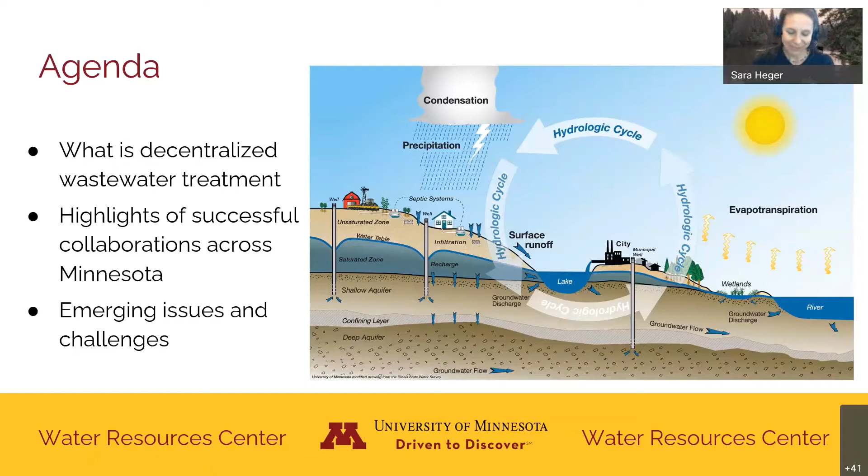But septic systems can be part of the solution of that issue. It also points out how important properly treating our wastewater is. Ultimately, probably most of you either with lunch or right now are drinking a beverage, and what we have to remember and consider is that water has been used before and will be used. One of my last topics, an emerging issue, is wastewater reuse. Ultimately, all of our wastewater is being reused - it's just a question of how quickly we're reusing that water. So that's always something to think about, that we're just recycling our water over and over again.

So first, looking at what is decentralized wastewater treatment systems - people call these septic systems, and that's what they are, that's what we call them here. But ultimately, there's a lot of different kinds of septic systems. This shows what's sometimes referred to as a drain field or a conventional system. It starts with primary treatment in a septic tank - Jack alluded to this being like wetlands, in that septic tanks are anaerobic, so the treatment occurring there is under an anaerobic environment. Some of my first work at the university 20 plus years ago was using constructed wetlands to treat wastewater, not very commonly used in our climate here for various reasons - we can talk more about that at the end if you're interested. But really, we start with that primary treatment that's more solid-focused.

Looks like we lost Sarah real quick there.

Sounds like your video went out and the screen share went out. Can you still hear us? Screen's back up, I'm back.

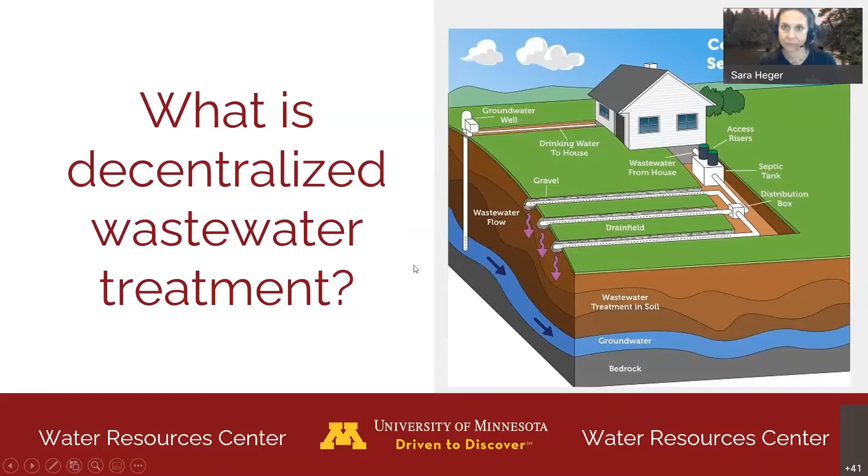So going over what we just talked about, a typical decentralized wastewater treatment system starts with primary treatment in a septic tank like you see here. Every wastewater treatment process starts with this, where we allow sedimentation to occur: heavier solids settle into the sludge layer, lighter materials like oils and greases float to the top. We see about 50%, give or take, solids removal occurring in the septic tank, and that results in the need for maintenance—every 3 to 5 years, most homes need to have that tank cleaned to assure we're not building up excess solids.

Our final treatment, disinfection, is in the SSTS portion, and what's required in Minnesota is 3 feet of unsaturated soil. There are other options for advanced treatment systems on challenging sites, challenging soils, or larger systems. For example, the largest septic system in Minnesota that I'm aware of serves downtown Afton, Minnesota. That's in Washington County, and that system is 60,000 gallons a day—that was their design flow anyway.

Directly down gradient from that are wells. So when that system went in, it was required to have advanced nitrogen treatment and secondary treatment prior to the soil, to assure that when wastewater potentially reached down gradient wells, it was safe for human consumption. In some areas, they rely upon well setbacks and groundwater dilution to meet that nitrate limit, but with larger systems, that's really not an option.

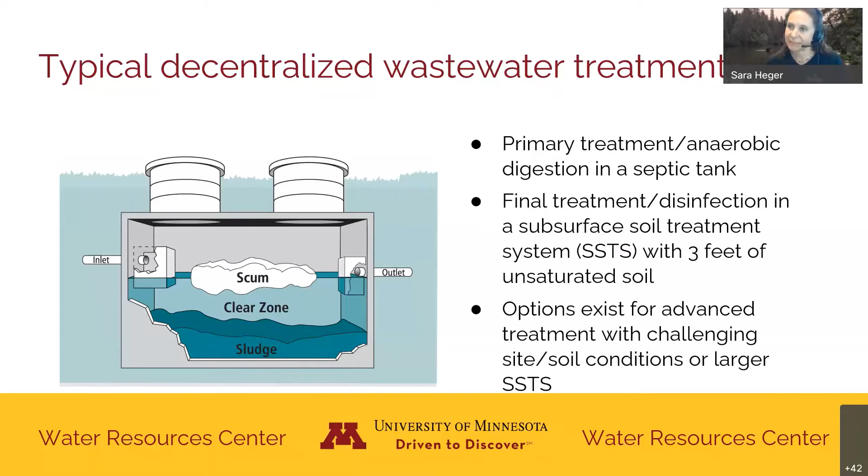Here in the Midwest, being very far from the ocean, we're not as concerned about nitrogen getting to surface waters, but we're very concerned about phosphorus getting to our lakes. So ultimately the nutrient issue depends a little on where you live—phosphorus is our limiting nutrient in most of our fresh waters.

So how this looks in someone's backyard: whenever possible we'll see from the structure, usually a house, but there are also a lot of commercial properties—campgrounds, rest areas, restaurants, since a lot of outstate Minnesota isn't in municipalities. The wastewater, when possible, flows by gravity. Every once in a while someone has to have a pump in their basement to get things out of a lower elevation, but then it flows typically by gravity into that septic tank, and when possible, by gravity to a soil treatment system. This shows a drain field type trench system.

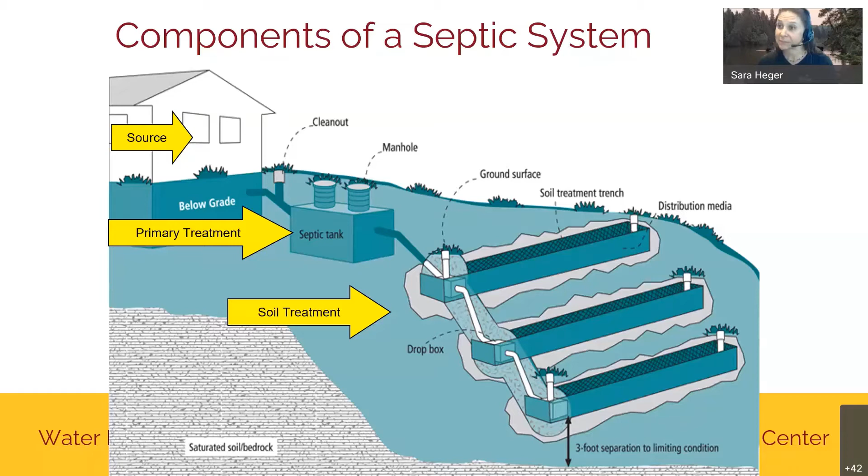The key thing to notice on the far right is that from the bottom of the system to saturated soil or bedrock is where we measure that 3 feet of soil. It was the most amazing thing to me when I got into this industry, that if you take dirty sewage—millions to a billion bacteria and viruses in 100 milliliters of water—after that 3 feet of treatment, the viruses and bacteria are gone. The organic material is all removed, the phosphorus has all been absorbed, we've converted all that ammonia to nitrate, and in some instances actually denitrified that as well, if the right conditions exist.

So this is where if we had easy polling, I would have you all fill out a poll. If you want to type this into the chat, you can. Otherwise, you can just think it in your head because I'm going to give you the answer. But just from your knowledge, what percentage of homes in Minnesota are served with a septic system?

Anyone have a good guess? I see a 24, I think that's what I saw. An 11. Anybody else? Casey's - I'm gonna just tell her right now, she's right?

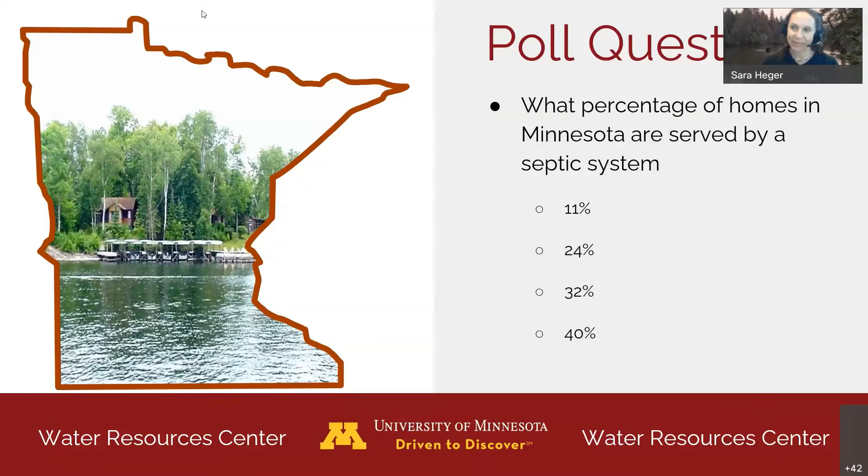So the right number in Minnesota is actually 32%. The national average is actually a little lower, so Minnesota is one of the higher percentage states. There are states - if you've ever been to New Hampshire, actually has more than 40% of their homes on septic systems. But here in Minnesota, we are right at that 32% number.

All right, so a little overview here of some of the information - oops, I have to go back one here, I missed that, just moving around faces. The history and statistics in Minnesota.

So this program in Minnesota actually started at the University of Minnesota in the mid-70s. There was a professor in the biosystems and ag engineering department at the time who really was asked, why are some of our lakes getting green? Could it have anything to do with these septic systems? At that time was right around the time the PCA was forming.

So there were rules that were written and there was a voluntary certification program that was started, and the University of Minnesota training occurred. Although I did mention it started in biosystems and ag engineering, very soon after, a gentleman named Roger Machmeier reached out to Jim Anderson in the soils department, and the two of them really together built our training program. Because at the end of the day, septic systems to me are the nexus of where engineering and soil science meet. So I'm guessing most of you are from the soil science side of things, and soils are a huge part of what septic systems are. So that's really what our training program teaches today - it teaches typically non-engineers and non-soil scientists those principles to be able to adequately design and install septic systems across Minnesota.

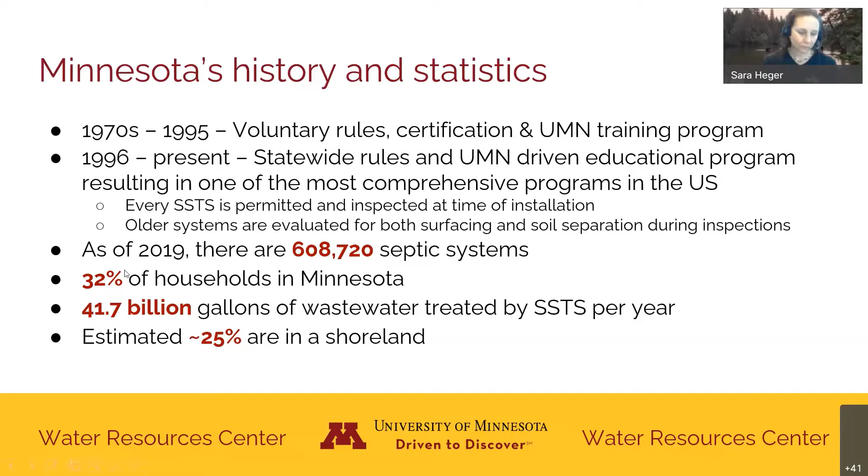This will result in protection of public health. We know how diseases and viruses commonly spread, most commonly from our waste. If our waste contains those pathogens, that can spread via water. The added benefit is that when we adequately protect public health, we're also protecting the environment.

Nitrogen and phosphorus are still, I would say, the driving issue now with wastewater treatment. I think we really figured out in the 70s, 80s, and 90s that organic removal and bacteria and viruses were really important. But what's really getting more attention over the last decade has been assuring that we're also dealing with those nutrients, which are both, I mean, nitrate is a public health issue, but phosphorus is really important in protecting our lakes, rivers, and streams.

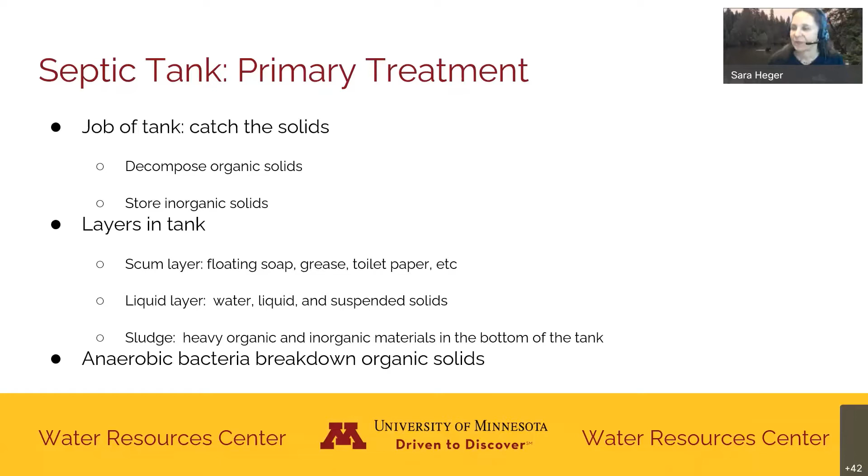So we see those layers forming in the tank: our soaps and greases and a little bit of toilet paper, most of which actually disintegrates within the process. Our liquid layer is not clean, it's still going to be cloudy or turbid, with some smaller particles remaining in suspension, and then the bottom layer being heavy organic and inorganic material. So if you open up a typical septic tank, what you will smell is anaerobic digestion—methane and hydrogen sulfide, gases being formed by that anaerobic treatment process.

So here shows a little close-up of that septic tank I showed before. Wastewater comes in from the left from our house. On the way in, there'll be a baffle, the purpose of which is to make sure the wastewater doesn't short circuit the tank. Septic tanks are designed based on detention time—how many days the effluent has to be settled and anaerobically digested.

So this is a modern septic tank, and the reason I say that is we have a riser both at the inlet and the outlet, and those risers are at the surface. This is really critical for maintenance, in that the proper way to clean those tanks is through large diameter access, because the sludge, as the name implies, takes work to get off the bottom of the tank. The other thing that more modern septic tanks have, which old ones don't, are baffles and screens on the way out of the tank.

The purpose of that screen on the way out is to further limit the size of particle that gets out to the soil. The soil is amazing at decomposing organic material, but some solids present in our wastewater, such as microplastics, may not be digestible by soil microbes. So as much as possible, the more solids are decomposed or filtered out prior to getting to the soil, the longer that soil treatment will function. So again, those are our three layers.

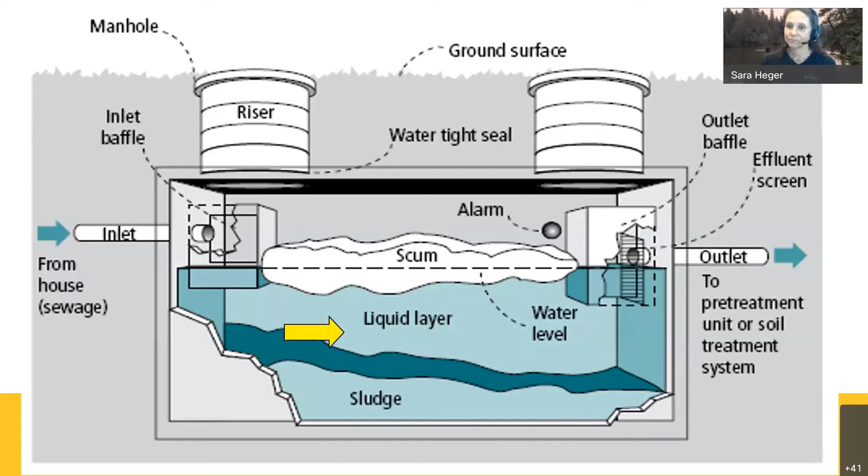So a conventional system—and this is a bit of terminology in our regulations, also referred to as a type 1 system—should rely on passive soil treatment. In order for these type 1 systems to be installed, you need to have 3 feet of unsaturated soil. This could be naturally occurring dry soil, which would allow you to put in a trench system, a bed, or an at-grade system, and I'm going to show some pictures of these coming up.

Or it could be by using mound sand, which is very similar to concrete or C33 sand, if you're aware of what that is. That can be hauled in to supplement any natural soil on site. You still, even to build what is called a conventional mound or a type 1 system, have to have at least 12 inches of dry soil.

That hopefully does a few things. One, it prevents us in most instances from building in a wetland. But it also assures us that even if the wastewater, as it goes through those 2 feet of sand, has been almost all the way treated, we still need somewhere for that water to go. We require, in Minnesota, that all wastewater stay subsurface and laterally move away from the system. If you don't have 12 inches of dry soil, that's pretty difficult.

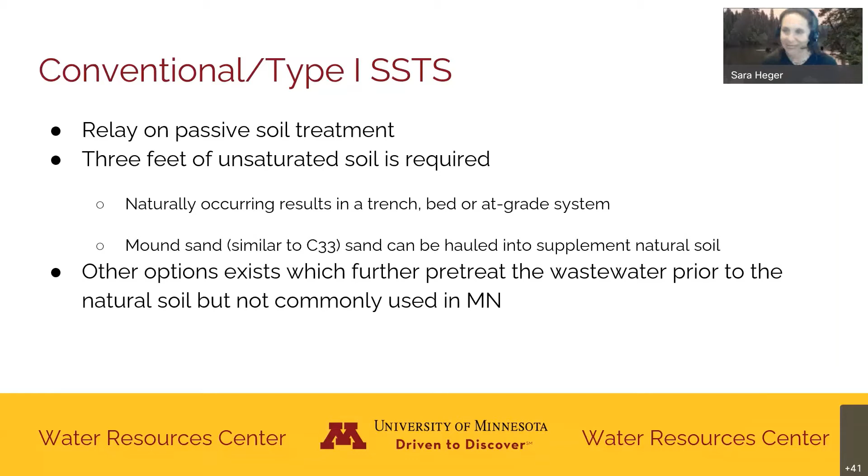There are other options to further pre-treat the wastewater prior to the natural soil. They're not as commonly used in Minnesota. I saw a question pop up about microplastics - we are definitely going to get into that a little later in the presentation. So if I don't answer that, we'll talk about it then.

I've shown some pictures of what the trench systems look like. This is just a bad diagram, but a diagram of what a mound system looks like - where I'm elevating my treatment system with that clean sand, so I still meet my 3 feet of soil. The reason we use sand is we can pick it up from the quarry or pit and move it to another location. Because it's relatively structureless, without using compacting equipment, just by natural construction, we can get it to a similar density that allows for good water movement, good percolation, and good treatment as it moves through that sand.

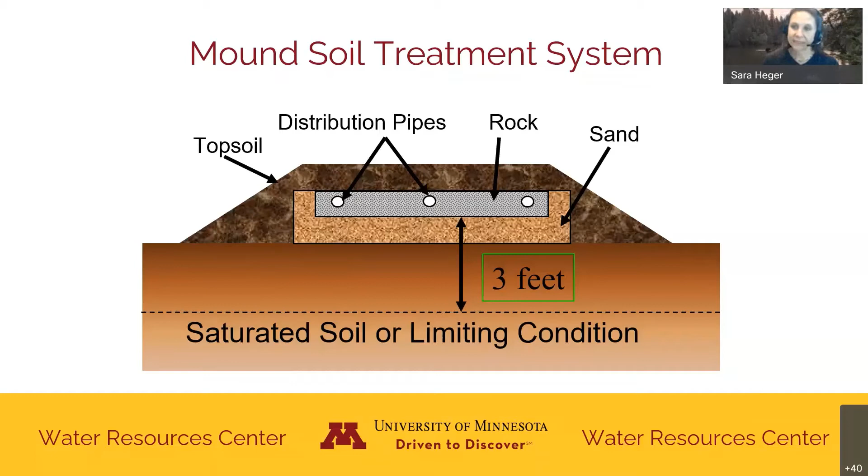So how we determine what kind of system we need - these are all standard conventional options in Minnesota - is how far or where you are in reference to a limiting condition. Our 2 limiting conditions we're really concerned about, and which of these are relevant depends where you live and whose property you're on, is either saturated soil or bedrock conditions. We'll define each of these coming up.

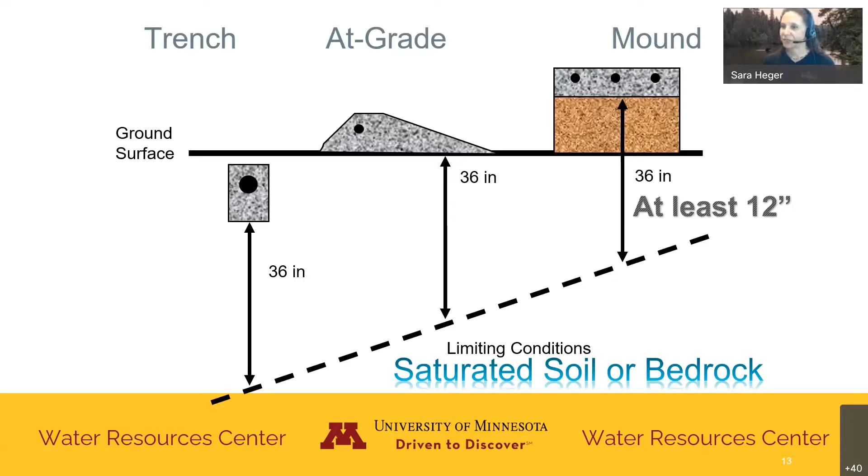On the far left, that would be my trench system where I'm actually in the ground because I'm able to achieve my 3 feet below that. The system in the middle being an at-grade, where I put my rock or distribution media right on the surface. And finally on the far right is a mound system where I'm hauling in sand to achieve my 3 feet, having at least 12 inches of dry soil.

So here are just some images showing what this can look like. The first one is a rock trench. The purpose of the rock - I'll bring up the next one here, that's actually called a chamber system, recycled plastic that's used. In both of these instances, the purpose of the media is just to spread out the wastewater. It's not doing the treatment for us - all of the treatment is really occurring in the soil. So just 2 different ways to do that.

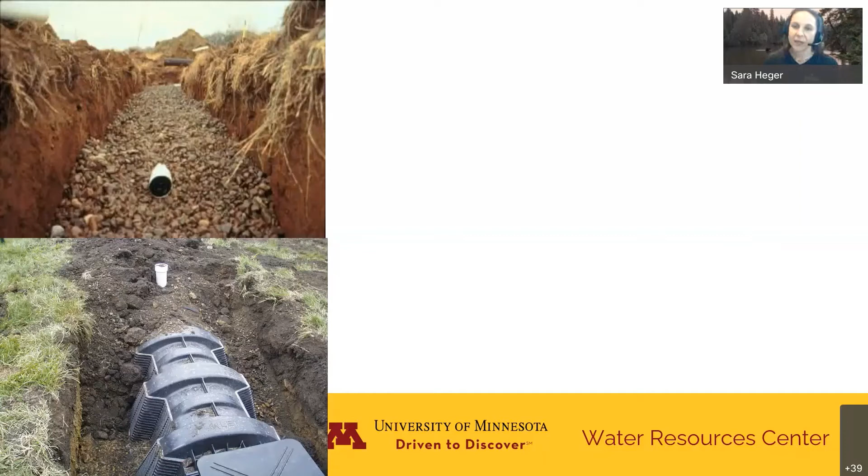So how do we determine what type and size system? What type is allowed is the first thing to consider, how much pre-treatment prior to the soil. Today I'm focusing on systems that just have a septic tank as primary treatment, but there are advanced systems, where a constructed wetland could play in as a pre-treatment system.

The second factor is how much natural unsaturated soil you have. Then the last variable here are your soil characteristics, which are color, texture, and consistency. We'll particularly get into redox features, but for all of our septic system designs, we are doing morphological descriptions of the soil.

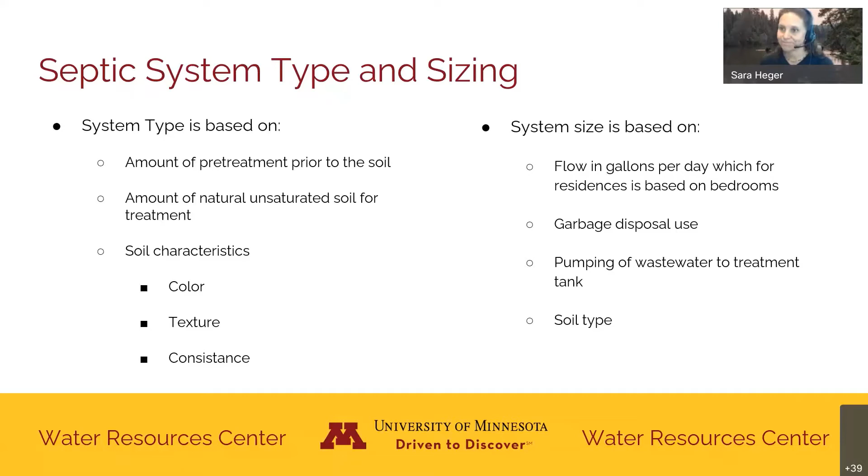Getting into the variables a little bit more specifically, since you understand soils more than most people I get to talk to — the critical soil characteristics we're designing on, the most critical one that affects the system right now is how wet the soil is.

But when we have a depleted matrix, when we have redox features, that is what we are using to define that we have a water table. It may be periodically or seasonally saturated, or it may be a permanent water table — our regulations do not care. As long as we have a depleted matrix or redox features, either of those will make that soil unsuitable for extended periods of time throughout the year and require us to stay 3 feet above that.

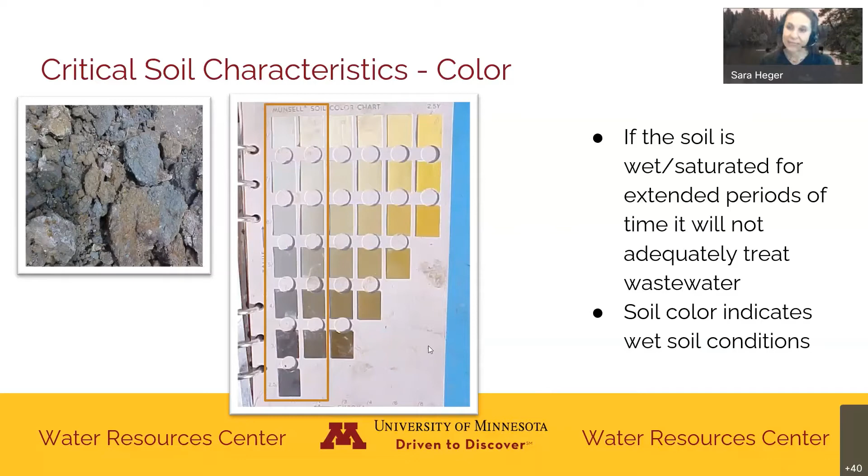So that is how we determine saturation, is by redox features. It takes extended periods of time for these to form. Generally speaking, when we see very gray or depleted matrix, the soil is wet or saturated. If all the iron has left, it's very wet. If it's gray with red mottles, it's typically more of a seasonal saturation, maybe in the spring or fall of the year. But groundwater is groundwater.

We are generally talking about perched water tables versus permanent, more of a regional water table. But some of our septic systems around lakes and particularly sandier soils, we may be dealing more with a regional water table, but very often we're dealing with water that's held up higher in a soil profile.

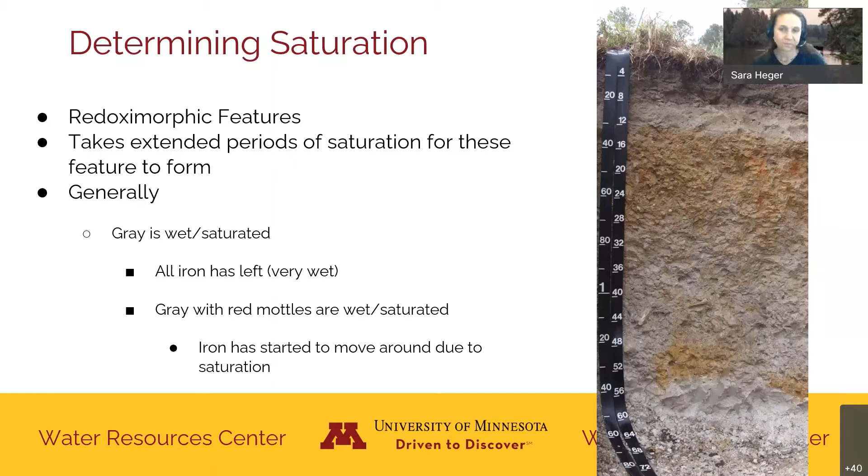The other limiting factor in soils is bedrock, and we have kind of an odd definition of bedrock. What I mean is most of the time when people think about bedrock, they think about something like along the North Shore where you have very little soil and it goes straight to bedrock. But our definition of bedrock is anytime you have more than half of your soil composed of rock fragments, and rock fragments are defined as anything greater than 2 millimeters. We are not going to count that toward soil treatment.

Typically you can envision that augering or boring is very difficult in these situations, so a soil pit can really aid in defining whether or not we are dealing with bedrock. In some sites it's super obvious, but when you get close and you're dealing with rock fragments, it can also be bands - you can run into a band of soil that ends up having more than 50% rock fragments. You just can't count that toward your treatment.

So there are many more nuances to what I'm talking about, but generally speaking, we don't count horizons that have more than 50% rock fragments toward treatment because we just don't have enough retention time. We don't have enough absorption sites. We just don't get good treatment through that portion of the profile.

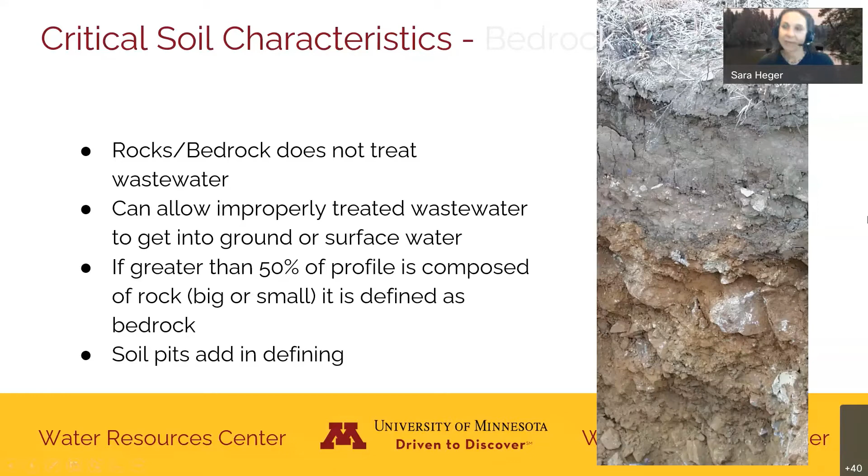So I wanted to touch on an overview of septic systems, how this is administered in Minnesota, and some key collaborations. We certainly at the University of Minnesota don't do this work on our own. Our goal really is having a strong science-based education program. We do research, and we also do outreach.

Tomorrow night, for instance, I'm teaching a homeowner education class in Mower County in the Albert Lea area. So anytime we can talk to property owners, that's really valuable because ultimately, at the end of the day, they are the ones who are operating these systems.

The MPCA has the policy and rules. They are the licensing and certification organization. They also handle compliance and enforcement. On a day-to-day basis, this program is implemented by counties, cities, and townships - our local unit of government programs that permit, inspect, and record keep for the over 600,000 systems in Minnesota. We have a large group of professionals, thousands of septic professionals across Minnesota, which include designers, inspectors, installers, service providers, and maintainers, septic pumpers.

One of the strengths of our program is all of our local unit of government inspectors go through the same training and certification program. That doesn't mean everyone knows the same, but it does set a level playing field with a base of scientific knowledge that's used across our industry.

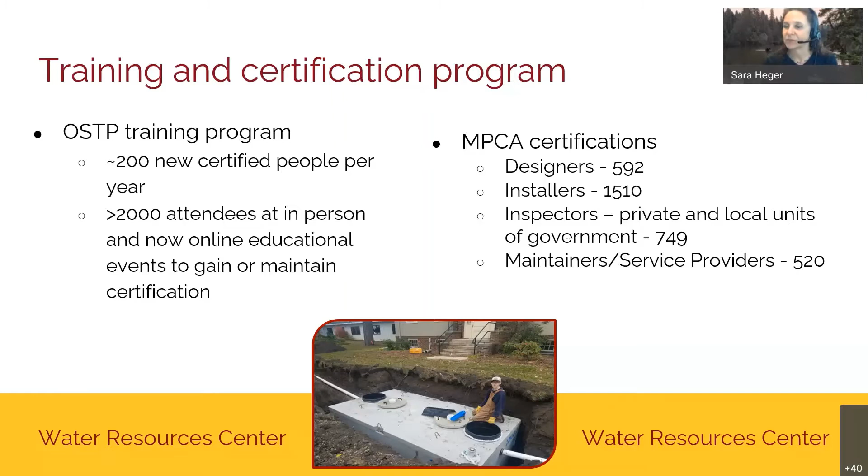Looking at the list of companies on the right, and some of these companies hold multiple certifications, you can see nearly 600 designers. The designers are the ones doing the initial soil interpretations for design. Installers put the systems in the ground. Inspectors, both private and local unit of government, also do soils work. And finally, our maintainers and service providers - a little over 500 of those - take care of the systems and do service on them.

We're continually striving to improve these numbers, and this is all based on estimates. Some counties have really good data, but most of the time they're basing it on the compliance records they've received to date, and they know that when systems are looked at, a certain percentage do not pass inspection.

So with that, we're going to move into the last, bigger part of the presentation, talking about emerging issues and challenges in our industry. I'm going to talk a little bit about COVID-19. Wastewater tracking has been getting a lot of attention lately, so we'll touch on that. We'll talk about small community wastewater treatment and affordability. There's nationally more talk about environmental justice and access to proper sanitation and clean drinking water being something that not all of us have in the US, and really is one of those key things we should all have - clean water and sanitation. We'll then touch on contaminants of emerging concern, a bit of our work with chlorides, microfibers, and finally water use and reuse.

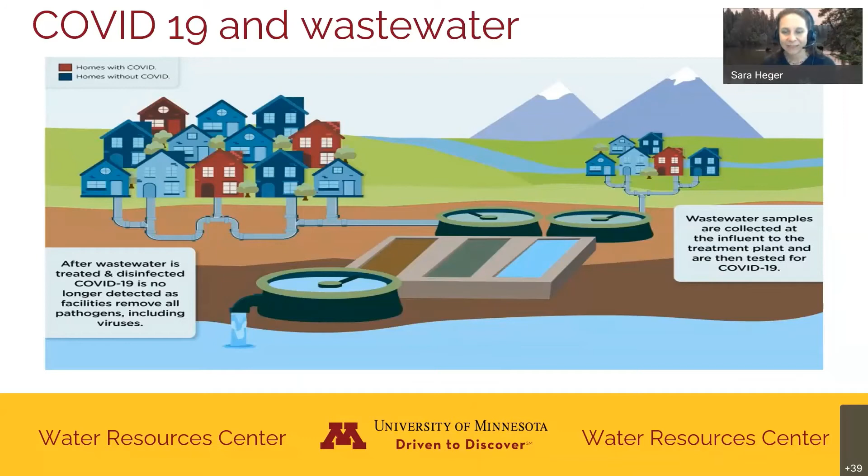I'd say this has gotten more relevant lately when most of us who are testing aren't going somewhere to get a test done, we're doing at-home tests, so we don't have a good feel for that. I want to highlight that the testing we're doing is not for active virus, it's just for the RNA. So even though we could find this in the effluent coming out of a septic system, that doesn't mean the virus actually has the ability to make anyone sick.

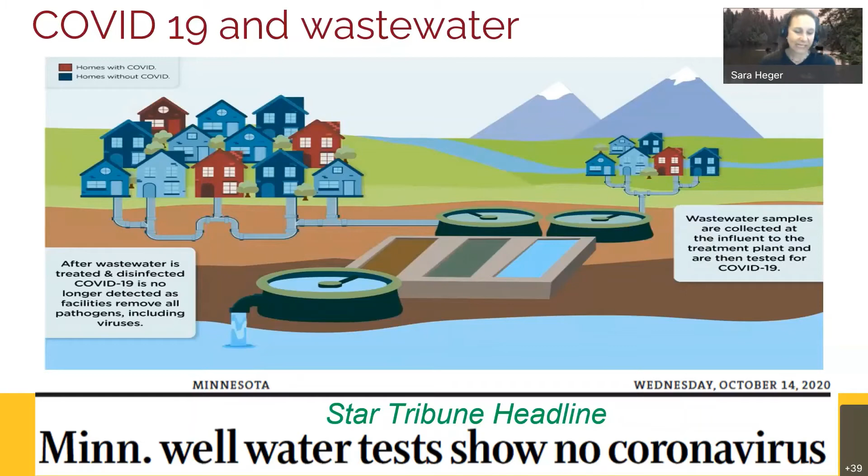So the good news for us is that from a wastewater treatment perspective, COVID-19 is very easy to treat. Wastewater treatment plants and septic systems are designed to treat viruses and pathogens, and COVID-19 is a type of virus that is particularly susceptible to disinfection. Something as simple as a soap molecule disrupts the fatty layer or coat that surrounds the virus.

Once the viral coat is broken down, the virus is no longer able to function. So if you happened to have it on your hands—I remember early in the pandemic I was walking my dog past a garbage can with his poop bag in my hand, and I didn't know if I should touch the garbage. We were afraid it could spread via surfaces. But the good news is soap and water deactivates this virus.

So we did some looking at COVID at rest areas. This was done early on in the pandemic, though I didn't know that at the time—I think we all thought last summer COVID-19 was done, not knowing it had many more years of life left. We sampled three rest areas in May, June, July, and August, looking for whether that RNA was present. We also tested for a chili pepper virus, known to be very resistant to breakdown, which is a good indicator of overall wastewater inputs. We did this work with the DOT, who runs all the rest areas in Minnesota.

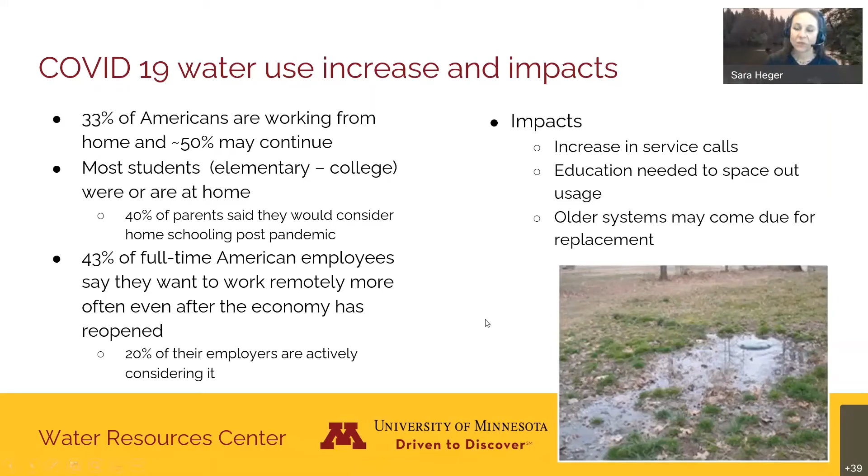So we've definitely seen an increase, and as was brought up earlier, many of our septic systems, we have a lot of them, are also increasing. We're not seeing fewer septic systems, because when we develop new lots, a lot of them are outside the extent of the municipal wastewater treatment system and therefore need septic systems.

Another concerning issue is that people are putting more sanitizers down the drain, and ultimately high amounts of sanitizers can be harmful to septic systems. We rely on naturally occurring bacteria in our systems, and most homes use some natural disinfectant that we can handle a little of. But when people start to push that envelope, it can negatively impact the microbes in our system.

So thinking about the difference between the systems we have and funding, that's what we're going to look at next.

Across the nation, about 75% of people are in more urban areas. There are about 16,000 wastewater treatment plants across the US, and this is where over 99% of federal funding has gone, to those large wastewater treatment systems.

When we look at the 25 million septic systems across the US, they're dependent on soil. We view them as being in more rural areas, but keep in mind, for instance, Anoka County has a ton of septic systems, and I don't think of that as rural. So over half of our septic systems in Minnesota are around our large urban centers, not within Minneapolis, but think about the Twin Cities metropolitan area, where a lot of people live around those big urban areas.

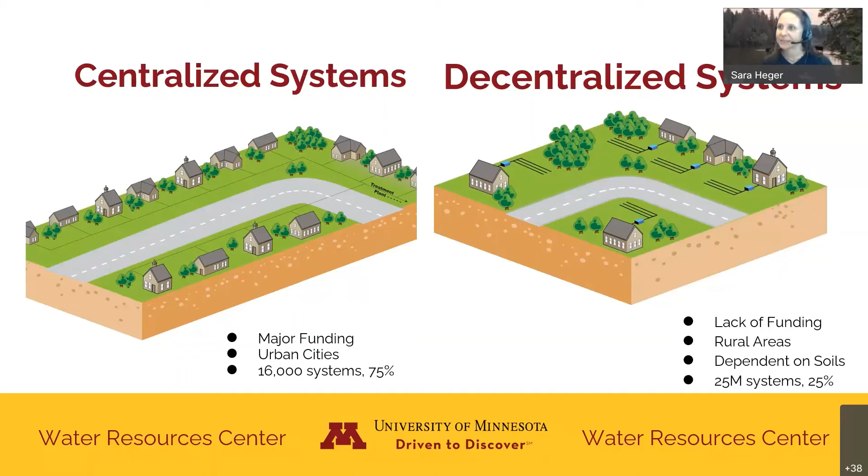So what the PCA is doing is hoping to actually hire some facilitators. These towns or communities don't have staff, they don't have engineers, so getting through the process of resolving these issues is hard, and if it was easy, they already would have done it. If they could have put a system on their property or connected to a wastewater treatment plant, they would have. So for most of these communities, a decentralized solution is going to be the best answer.

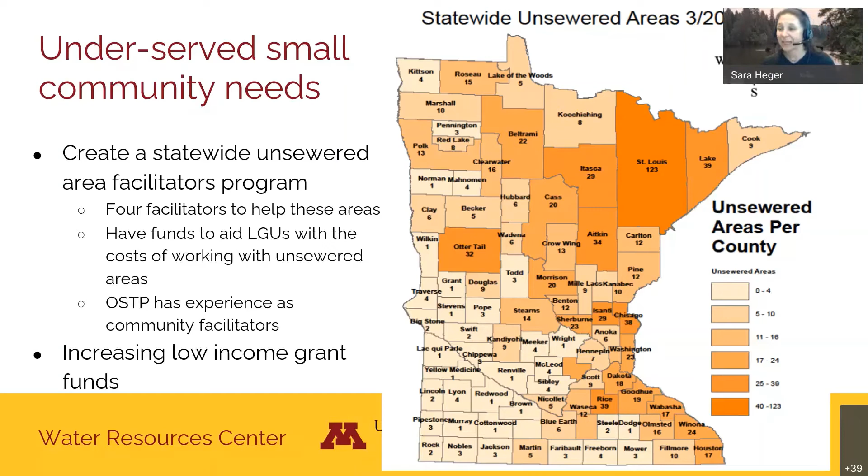But we also need funding to help local units of government. We need an increase in low income grant funds. In general, our state has had a lot of funds, but not enough to meet the need.

So this shows the Clean Water Fund. What you'll see is about $750,000 each year is available, up to a max of $40,000 per county, which typically pays for 3 or 4 systems. There's been $8.3 million in Clean Water funds awarded to counties for low income fixes, resulting in about 850 systems. But the overall request is 13.5 million, so we're not meeting the actual demand that's out there.

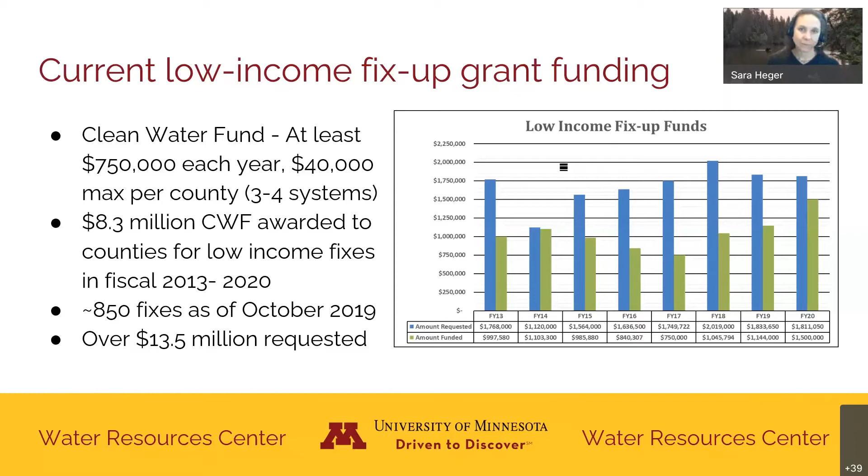So this shows our public investment by year in Minnesota, and I can tell you, from my experience across the US, Minnesota definitely leads the charge in how much we've invested in improving wastewater treatment. You can see it going from 4 million, with a peak in 2017 of almost $23 million. A lot of that really stepped up when the Clean Water, Land and Legacy Amendment was passed, giving 25 years of guaranteed work to help improve our waters in Minnesota.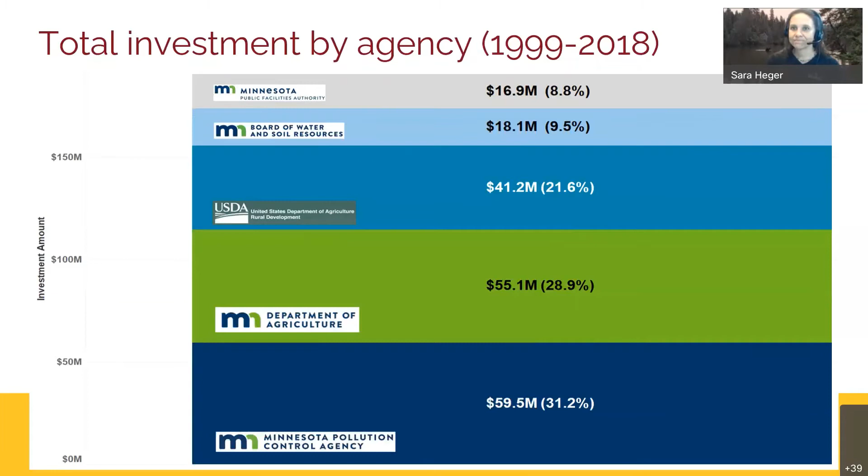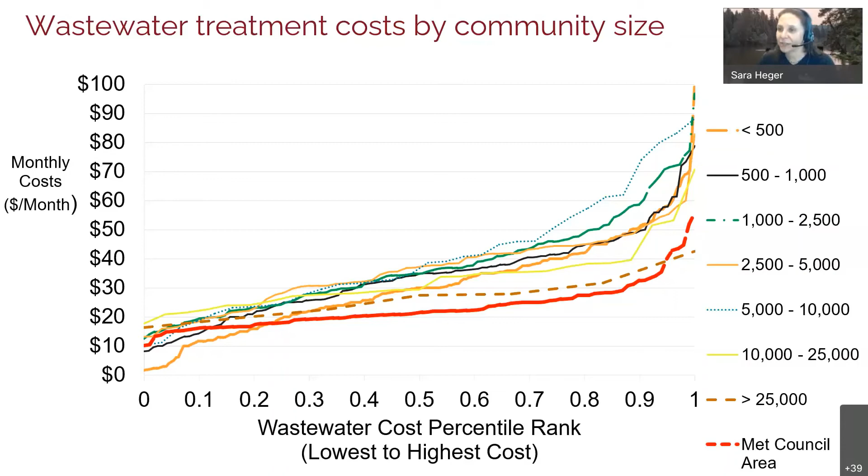One of the big challenges has been the really small communities. Ultimately, the size of your community really does impact the cost of wastewater treatment. The larger your community or service area, generally the lower the cost is. So this is looking at monthly costs by percentile rank, and you'll see that Met Council, being a very large service area, has some of the lowest costs. As you get into those small communities, you see higher costs for wastewater treatment. Many of these small rural communities, when you start getting into those expensive costs of $70, $80, $90, that's a significant part of people's budget.

So with that, we're going to move on to CECs. This is probably a term you've all heard before, but CECs are thousands of chemicals that are produced and used every day. Many of these things are found in the environment. It could be over-the-counter medicines, so you see Cortizone-10. It could be prescription medication. Many things fit into this. Pharmaceuticals and personal care products are the most likely things that are ingested by humans and then deposited into our wastewater treatment system.

So this is definitely an emerging issue, one we're looking at both here in Minnesota and nationally, to see what's happening with these CECs as they move on through systems.

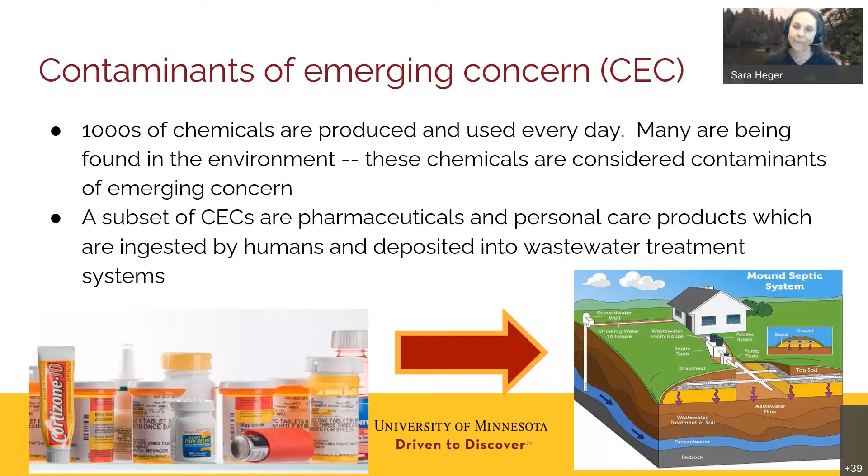Our current project, we're just wrapping up now, we're finally in year 3 of this study, is monitoring CECs. On the left, we don't have a house, we have a rest area. A rest area is kind of unique for this, and the reason is, one, we don't have laundry or gray water, so we won't have all the personal care products you might have at a house. But the big difference is we have lots of people using it, so we'll find a lot of those consumable CECs, things that we put into our bodies. And we should find a lot of them because a lot of different people use it.

If you just went to one house, you would just happen to find what they're using. So as part of this research, we're collecting up to 4 samples depending on the site: one is the effluent leaving a septic tank, or if they have an advanced treatment system, we're sampling after that. We're taking a soil sample, literally seeing what is potentially absorbing onto the soil interface. And then we're finally measuring that shallow groundwater to see what is making its way through.

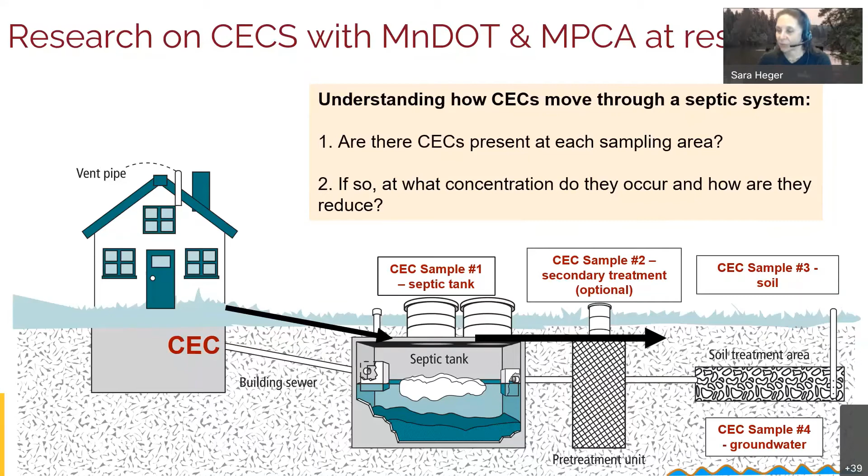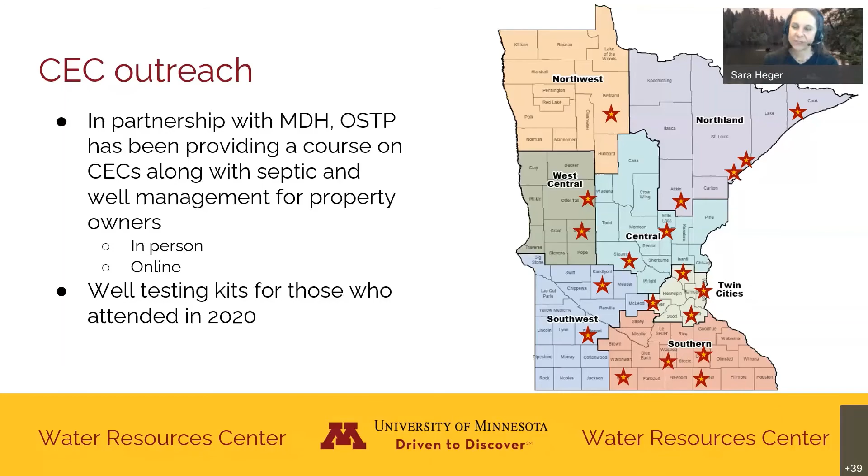So with that, moving on to chloride. I'm just hitting the highlights of these projects since I only have you for a little over an hour. Looking at our chloride budget, we had an LCCMR project to look at, on a statewide basis, where salt is being used. This looks at how we're finding more and more impaired waters for chloride.

A study was done in the Twin Cities, but the Twin Cities has a lot of roads, so the question was more on a statewide basis—where are we using more of our salts? Ultimately this is an issue for impaired waters, but also for wastewater treatment plants, as more are finding they're discharging wastewater above the allowable level, the chronic standard for aquatic species.

This first set shows, on a statewide basis, all the salt sold in our state and what it's being used for. You'll see the highest percentage is road salt.

17% there is water softeners. The one that was surprising to me was the amount used for fertilizer and livestock waste—that's a fair amount of the pie as well. You'll also see industrial use, atmospheric deposition, and dust control containing chlorides.

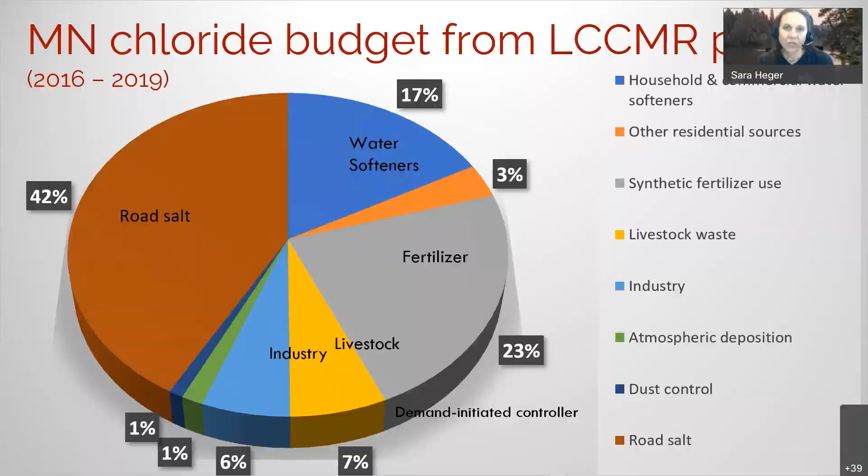The next part of the project was to look at wastewater treatment plants, and where the chloride is coming from there—because road salt is actually a very small piece of that equation.

When you look at this diagram across many wastewater treatment plants, it's estimated that 65% of the chloride from wastewater treatment plants is coming from water softening. So decreasing the amount of chloride leaving your home, if you soften it, could be beneficial to wastewater treatment.

But keep in mind, for a given wastewater treatment plant with an industry—say a truck washing facility that washes down salt—that would be an industrial source, which could also be a big part of your chloride budget.

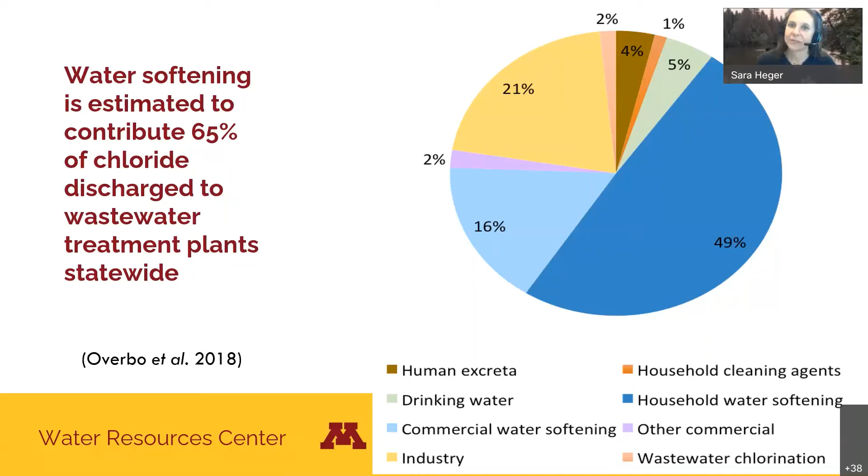Some outcomes of that project: water softening is a large source of chloride. If you're softening using ion exchange, like typical water softeners, less salt is better. Conserving water, softening less water, and using demand-based controllers like the one shown, versus older timer controls, really reduce the amount of salt used.

Other outcomes—we need additional research on some agricultural inputs, and we need chloride evaluation within either an impaired water or a wastewater treatment plant. You really need a more detailed evaluation to determine the primary chloride sources and what we can do to get under the standard of 230 milligrams per liter.

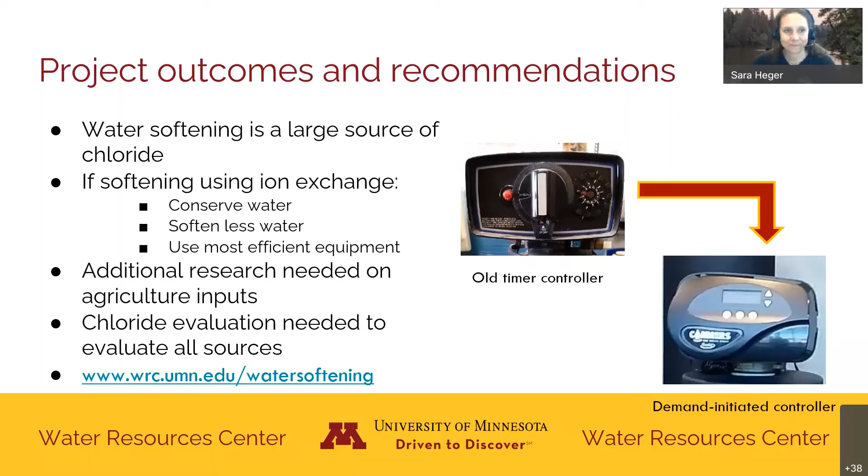Any questions at this time, Jack, before I move on? Nope, looks good. Okay.

One related outcome is our work with MnDOT, looking again at whether there's a way to manage salt trucks. When salt trucks go back, and these exist in all kinds of municipalities, and they wash down those trucks, you don't want salt sitting on your equipment.

We started by monitoring what was coming out of those wash-downs, and we measured concentrations from 4,000 to 55,000 milligrams per liter of salt—compared to the standard of 230 allowed in a lake, river, or stream. When we did that monitoring, we didn't find a lot else in that water.

We measured solids, bacteria, metals, and VOCs, and found very low levels. So the recommendation after that work was to install a treatment system to reduce the solids and use that effluent to make brine. We left the chloride in it because we're still going to keep using brine. That's not going to really change, right?

We all want to drive. Well, maybe we all don't. But a typical Minnesotan wants to drive 70 miles an hour down the freeway the day after a large snow event.

So in 2020, we installed 2 pilot systems, and they were actually tested during 2020 and now 2021. There's a report on our website where we calculated the amount of salt that was reduced, plus lessons learned. What I can tell you is they worked really well. They were really easy to operate, which was really important to MnDOT. They couldn't handle another thing that had a high level of management. And they had no issues as far as using that treated water to make brine.

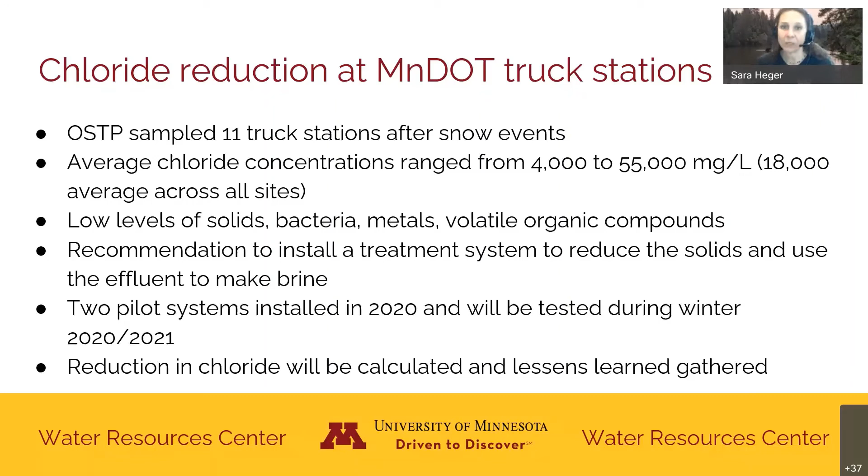And the reason why some treatment was needed is we didn't want to clog up the brine spreading equipment, or also spread that on roads.

So moving on to microfibers, which I think was an earlier question. There are more and more synthetic fibers going down the drain. You'll see a lot of the fibers we are now wearing—polyester, spandex, nylon, and acrylic—are shed off of our clothing when we wash them.

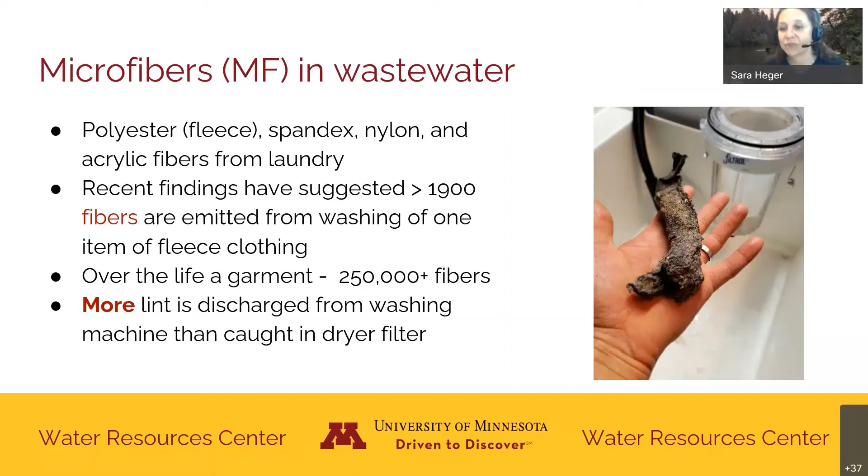We all have a lint filter in our dryer. What I can tell you based on research is more lint comes off in your washing machine than your dryer. A recent study found that over 1,900 fibers are emitted from washing one item of fleece clothing, which can amount to 250,000 fibers over the life of a garment.

This is an area we do need more research. I think there are 3 areas we really need to be looking at. One is, can we reduce it at the source? Some of that would certainly require public education, particularly if we want people to install aftermarket lint filters. That's the diagram I have on the right, something that filters your laundry water.

This is not a unique issue to septic systems. Wastewater treatment plants also discharge microfibers to lakes, rivers, and streams wherever they're discharging. A vast majority of it is settling out into the biosolids or sludge, but that isn't treatment, it's just removal. And a lot of our biosolids end up on fields, on the soil, where those microplastics can persist.

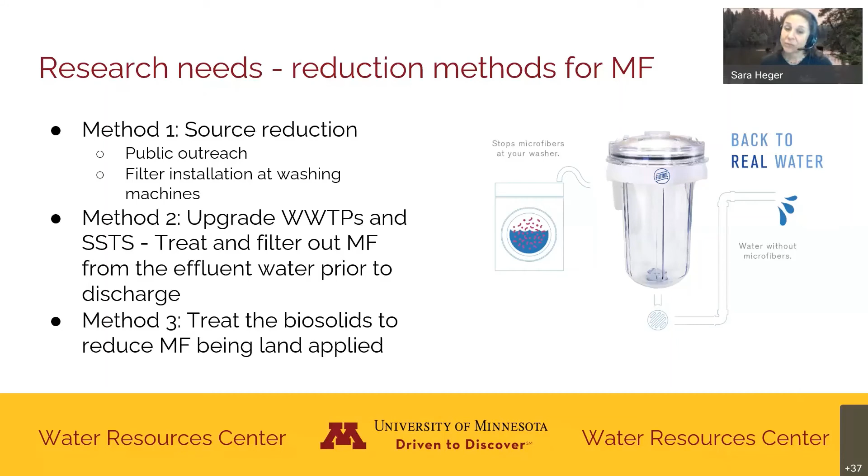So public education and filtering would stop a lot of this from going down the drain. The second issue we need more research on is, can we upgrade our wastewater treatment plants and septic systems to reduce the amount they're releasing? And finally, is there anything we can do to biosolids to reduce the amount of microplastics?

So my next question for you all is, in about the last 20 years, in our typical home in Minnesota, how much less water is the average home using? You can type into your chat box, or just think it in your head. Somebody said 9. Anybody else want to answer?

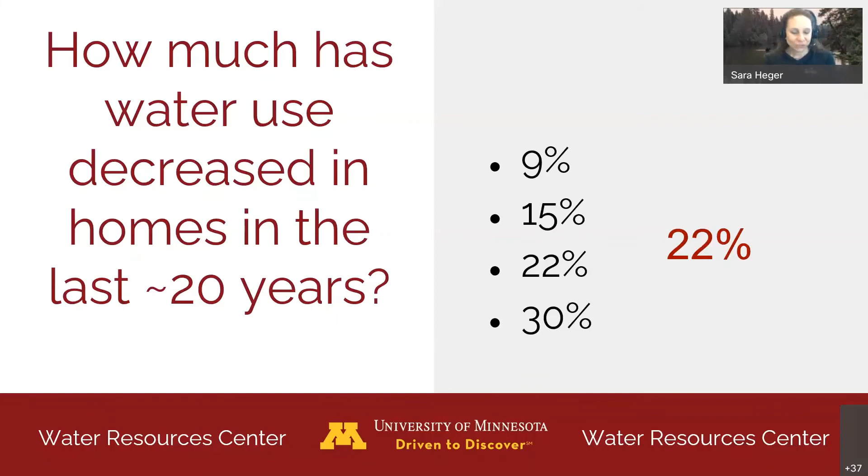I was waiting for the right answer. I've seen a lot of answers, but I didn't see the magic answer yet, which is 22%. So what is this based on? It's based on 2 studies, one done in 1999 and the other in 2016. That's not quite 20 years, it's 17 years. But the difference between these 2 studies found a 22% decrease in water usage in people's homes. A little bit of the data was from Minnesota, but it was across the US.

One of the more interesting parts of the study to me was that indoor water use did not matter where you live. There was not a statistical difference between water usage in Minnesota and California, which is not what I would have expected. People like to flush their toilets just as much in California as they do in Minnesota, but outdoor water use was different. I'm only focused on the interior water usage data that came out of the study, and you'll see the 2 biggest reductions were in toilets and washing machines.

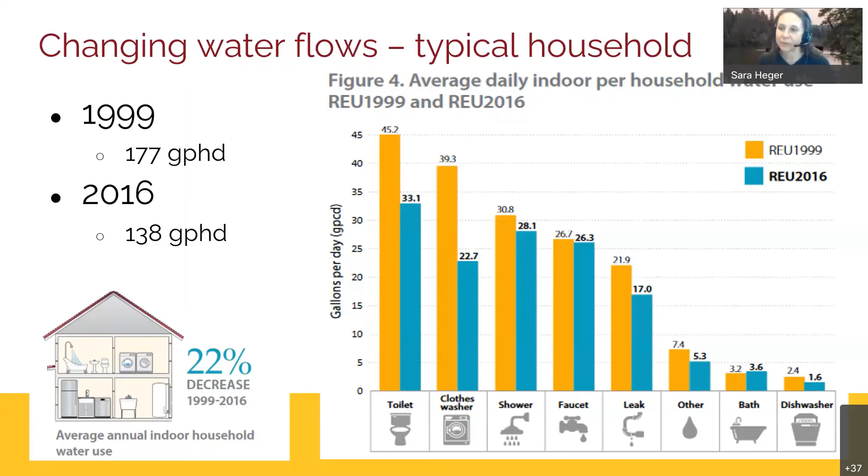Another study, not directly the same one, but I want to point out that when using less water is great, ultimately that means the concentration of contaminants in our wastewater is going up.

BOD is the biochemical oxygen demand. Generally speaking, in the past we'd say that number should be less than 170, but a more current study done across the US showed the median value was 216. We've also definitely been seeing nitrogen levels rising. In the past, 30 or 40 milligrams per liter of nitrogen was pretty typical, and now we're at 60.

So what I like to tell people is, if you have a low flow toilet, the contaminant you add to it stays the same. The only thing that changes is how much water is associated with it. That's why we're seeing our concentrations rise.

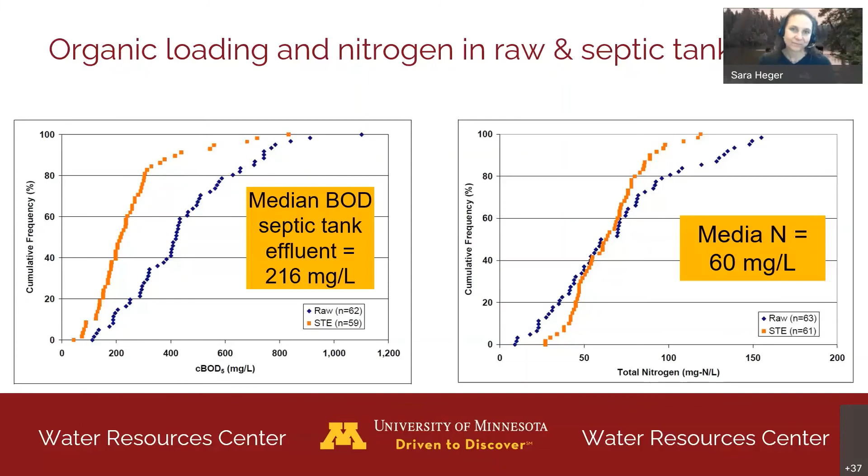So what are the impacts of low flow toilets and front loading washing machines, which I'm all for? As more people build new homes, remodel older homes, or replace old fixtures, flow volumes will continue to reduce. We expect to see less than 138 gallons.

Concentrations will rise. We've always talked in our industry about treating gallons - how many gallons? But we can't just think about hydraulics. We also have to think about the overall mass of whatever contaminant we're trying to treat, because the amount of organic material doesn't change. We still have to be able to treat it all.

The other challenge that arises from this is more of a municipal, centralized issue: we have less water flowing in pipes, which means things can more easily clog.

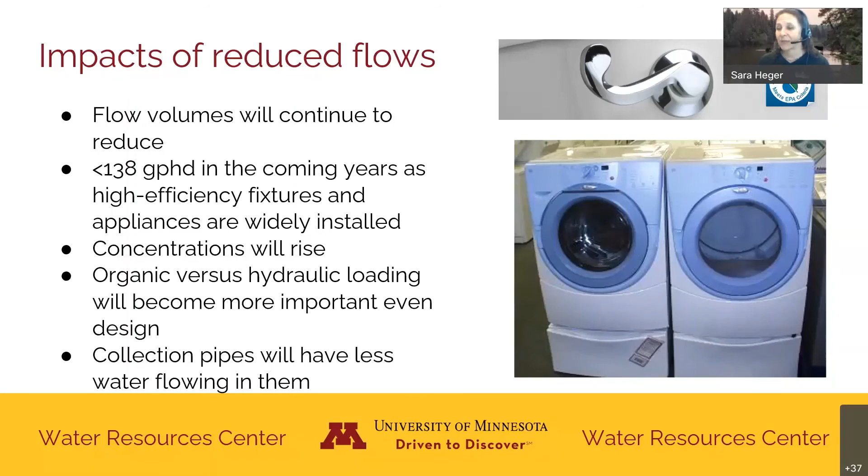My last topic here is about wastewater reuse. Ultimately, as I started this talk, we are reusing all of our water - it's just a function of how quickly.

Reuse has really taken off more in our arid regions where water scarcity is a bigger issue, and scarcity due to climate change is anticipated to further impact water supplies. Other reasons we're considering water reuse are to make water supply more reliable, provide diversification, and extend the capacity of existing infrastructure.

There are wastewater reuse projects in the middle of San Francisco, and there are a few examples in Minnesota. If any of you have been to the new state park at Vermilion, it actually has a reuse system where they take shower water and use it for toilet flushing, after it goes through some treatment.

The big thing they ran into, true of almost every example like that, is that people use a lot more shower water than they do toilet flushing water, so you end up with extra water. The highest percentage of reused wastewater in the US goes for agricultural irrigation or landscape irrigation, like golf courses.

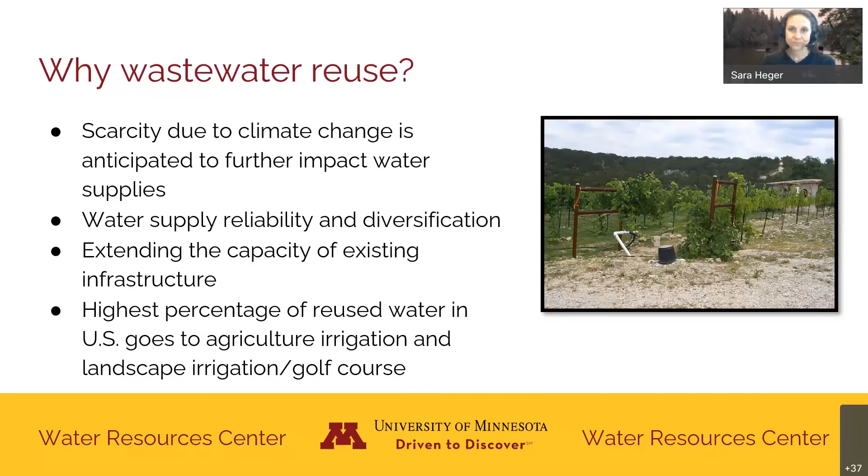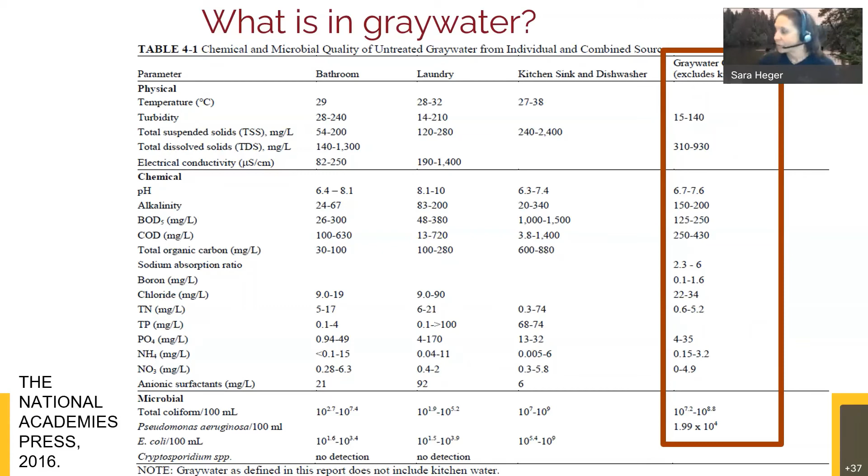So some of the challenges - the first one I already hit, the first one I didn't. Gray water reuse, even for toilet flushing, requires plumbing and treatment systems. Commonly these are being applied at multi-residential buildings or neighborhoods.

Pathogens and organic matter require treatment prior to reuse. Looking at the example on the right, that water on the left can't be directly reused - it has to be treated.

The other big challenge is that operation and maintenance of gray water treatment systems is currently not well guided or monitored in Minnesota or most of the US. This is something we're looking at more within Minnesota, having more consistency, because it's challenging - within the house that's plumbing. When it leaves the house it can be a septic system, but if it's an interior treatment system, that's considered to be a plumbing fixture and then covered under different code.

State agencies having consistency in regulations has also been a challenge around reuse of wastewater. There are examples where they're looking at potable reuse, so could we make water that's actually drinkable? There are areas where they're looking at using treated wastewater to recharge groundwater. So there are lots of examples of reuse occurring, and I think it's something we're just going to hear more and more about in the wastewater treatment industry.

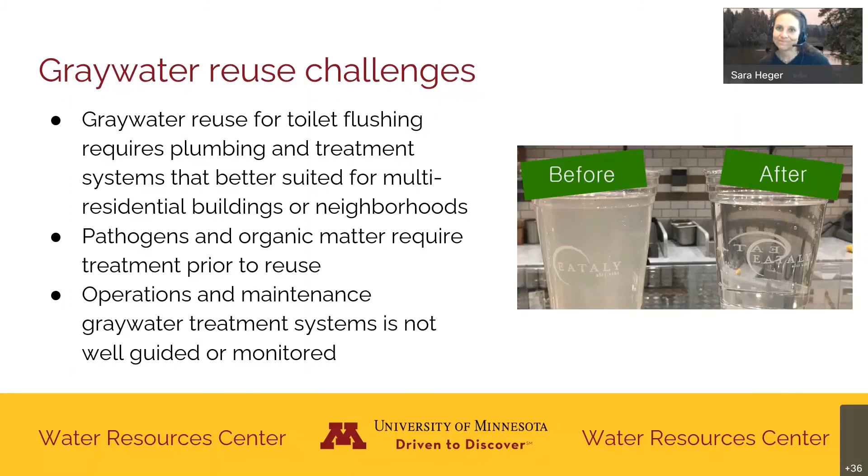So in summary, septic systems are a really important part of our infrastructure in Minnesota. There's a need to assure our Minnesota waters are protected, that we adequately treat that wastewater so we're protecting our water resources. As always, there are existing and upcoming challenges in our industry, and I'm one of the team at the University of Minnesota who works on these issues, so I'm certainly not doing this all alone.

I don't know what all of your day-to-day jobs are, but we have a really great resource at the university. We've been around for over 40 years doing education and research about septic systems. In the future, if you ever have questions or issues that arise, we do offer a lot of training too, geared towards gaining certification and learning more about how we design and install septic systems. I didn't get much into this, but this industry is booming and needs people - there's certainly in certain pockets of the US a need for more professionals in this industry.